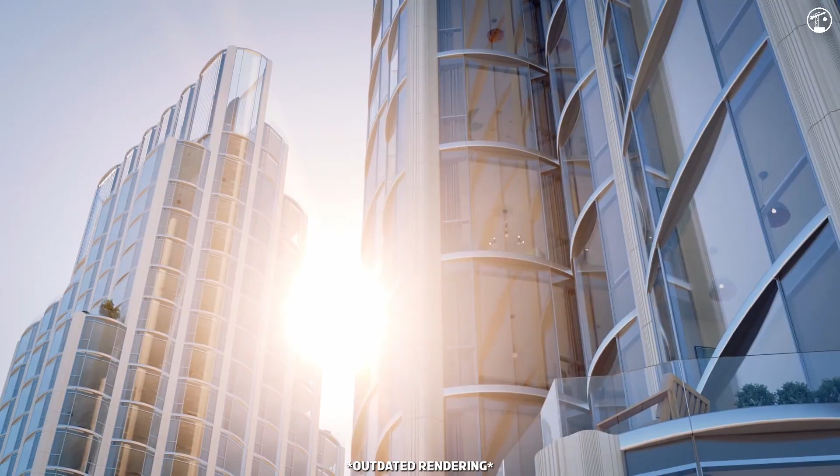This is 400 Lake Shore Drive. It's a site that's been waiting for its moment after one of the city's most ambitious skyscraper projects failed before it could rise. But today, this location is transforming, and the skyline of Chicago is about to change. From an unfortunate dream to a new vision, let's explore what's happening at this crucial spot in the heart of Chicago. To help me tell the story, I packed my bags, hopped on a plane, and traveled to the Windy City.

Chicago is an incredible city, and despite some of its well-known challenges, my limited experience in the area has been very pleasant. It boasts an impressive blend of architecture and history, making it one of the most iconic cities in America, all of which is nestled at the meeting point of Lake Michigan and the Chicago River. Today, we're zooming in on that very spot, at 400 Lake Shore Drive, a piece of land with a hopeful future that bridges these two waterways.

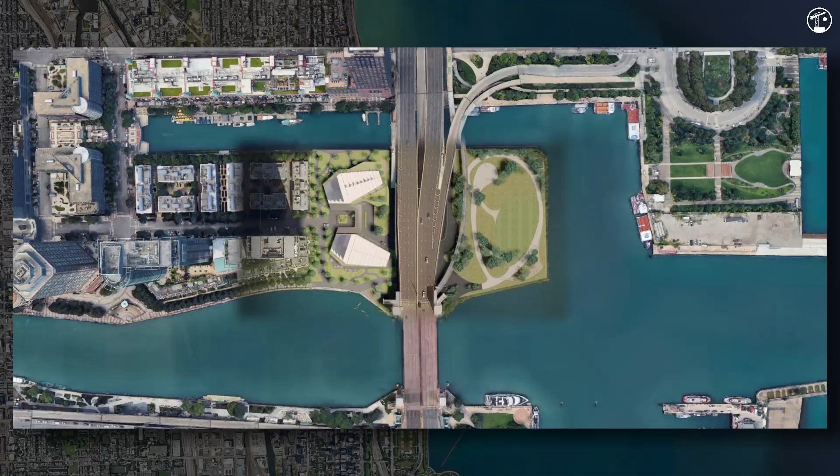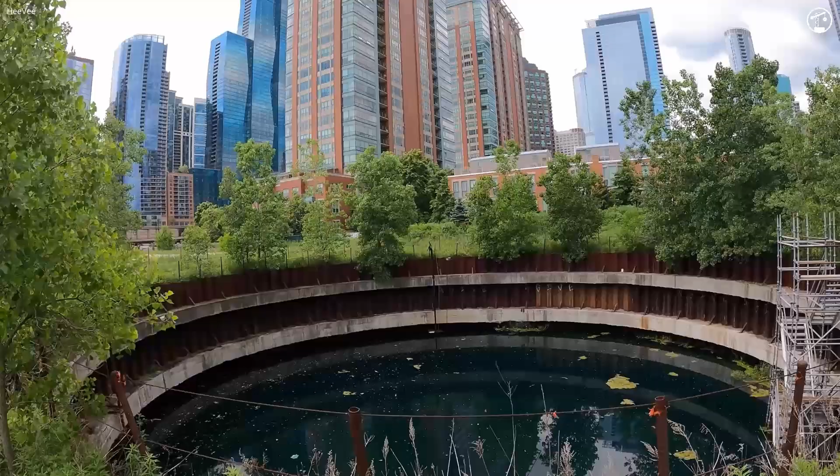The hole remained a relic as one of the most ambitious, yet ultimately failed skyscraper projects in recent history. Here's a quick 60-second summary of what happened with this project and why it was ultimately unsuccessful. In July of 2005, Christopher Carley of the Fordham Company proposed the Fordham Spire, a 116-story tower combining hotel and condominium spaces. Designed by renowned architect Santiago Calatrava, the tower was planned to reach 2,000 feet, making it one of the tallest buildings globally. Despite its striking design, it faced criticism, including from Donald Trump, who questioned its financial viability and security.

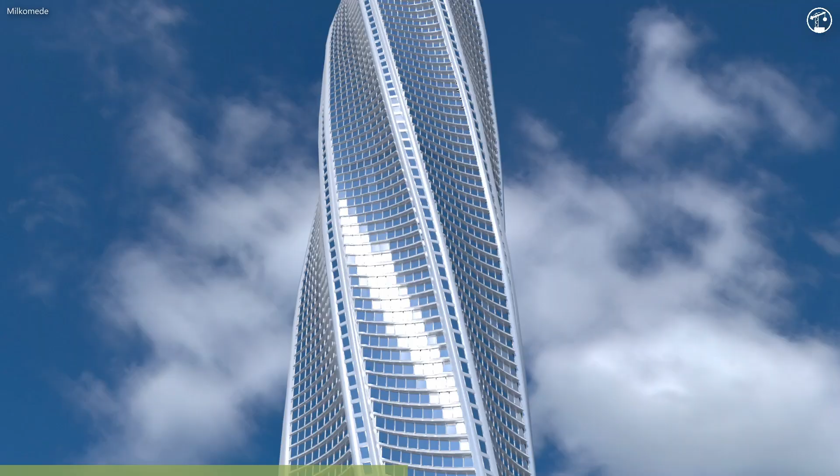Unable to secure sufficient funding, Carley passed the project to developer Garrett Kelleher in 2006, who renamed it the Chicago Spire. Kelleher revised the plans, removing the hotel and antenna, and focused on luxury condominiums. By 2007, the project was gaining momentum, with condo sales and city approvals. However, the 2008 global financial crisis led to a halt in construction, leaving only a massive excavation at the site. The project faced mounting legal challenges, and Shelbourne Development struggled to manage the loans and lawsuits. By 2009, the Chicago Spire was abandoned.

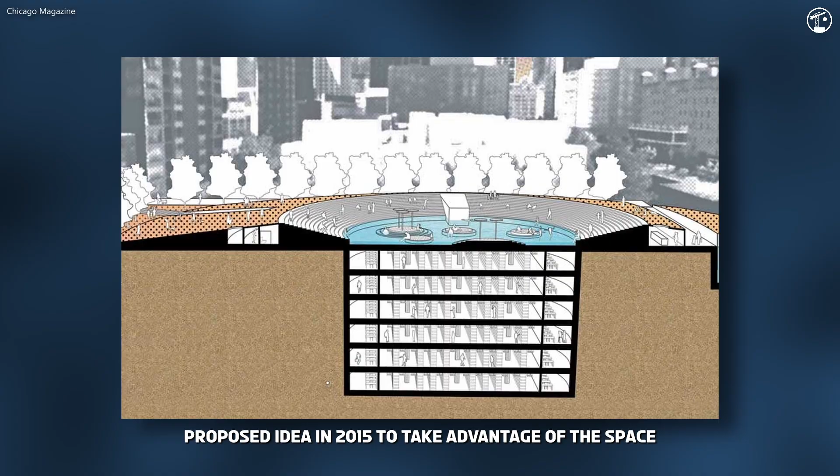Efforts to revive the project through union loans and additional financing proved unsuccessful. By 2010, the bank filed a foreclosure lawsuit. Kelleher's attempts to reorganize or regain control of the project were ultimately unsuccessful. In 2014, after years of litigation, the site was transferred to Related Midwest, marking the official end of the Chicago Spire project. But the 76-foot deep cofferdam remained, and because of its location, Chicago residents had a hard time not noticing it, and it quickly became an infamous eyesore. However, things were about to change.

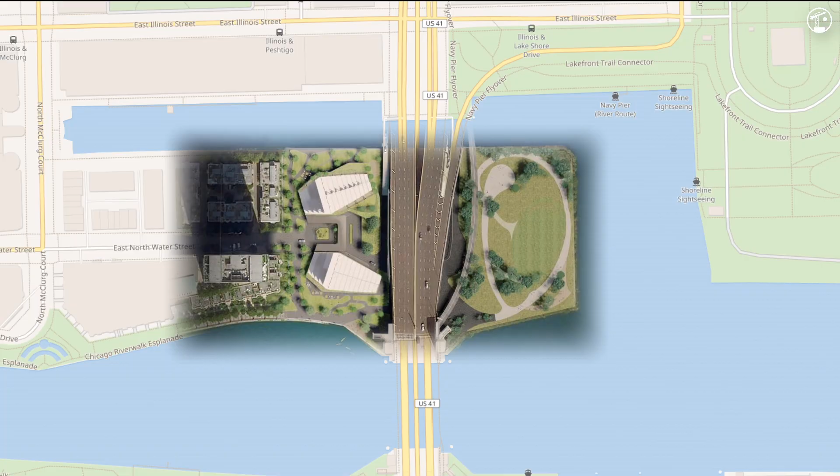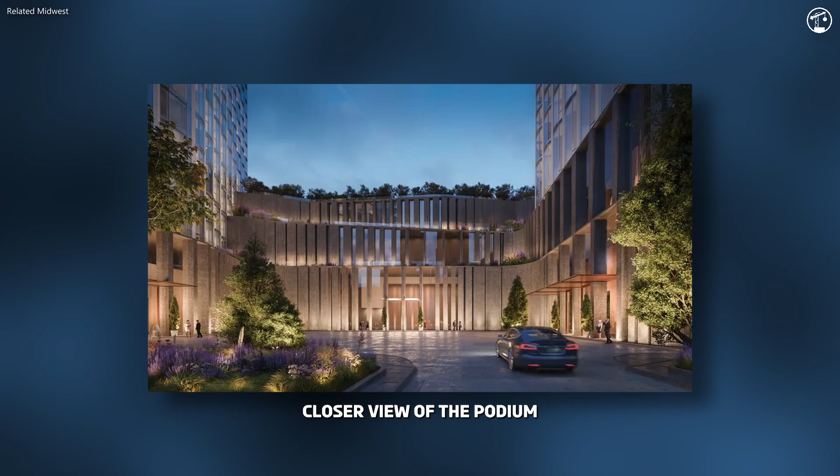The project encompasses two primary areas, the site where the north and south towers will sit and the fully redeveloped DuSable Park. In May of 2018, Related Midwest unveiled its initial plans for the site. The proposal featured towers reaching 1,100 feet and 850 feet. These would be connected at ground level by a podium that included 2 restaurants and a ballroom. The development was set to include 300 condominium units, 175 hotel rooms, and 500 rental apartments. However, in 2018, the proposal was rejected due to concerns about the development's impact on the surrounding neighborhood, specifically regarding the inclusion of hotel rooms and the size of the podium.

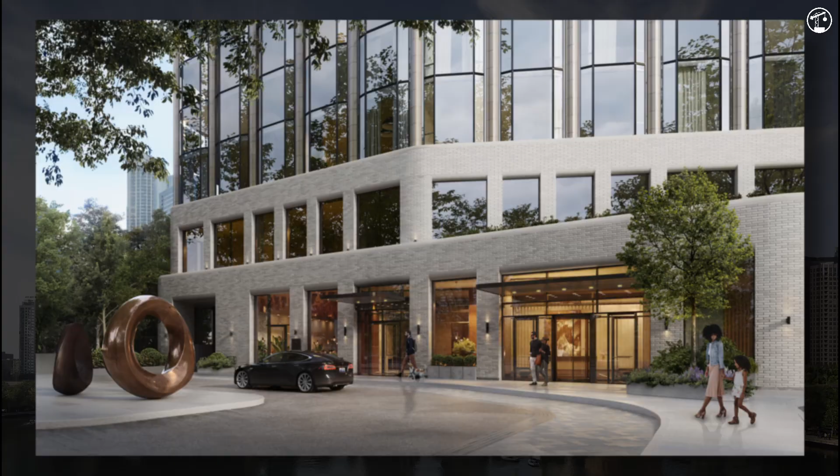In February 2019, the Chicago Plan Commission granted Related an extension of its zoning rights to allow for revisions to the design. By June 2020, the Chicago City Council approved an updated plan, which included significant changes. The towers were scaled down, with the north tower reduced to 875 feet and the south tower reduced to 765 feet. The hotel and condominium components were completely removed, and the podium size was scaled back. The architecture firm behind the design is Skidmore, Owings & Merrill. More commonly referred to as SOM, they have arguably the best portfolio of skyscraper design in the world. Within SOM, this effort was led by David Childs, who was also the primary architect for the One World Trade Center.

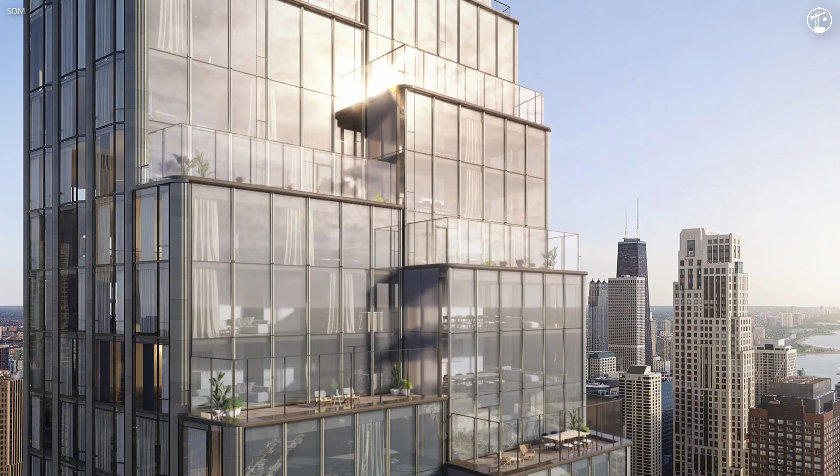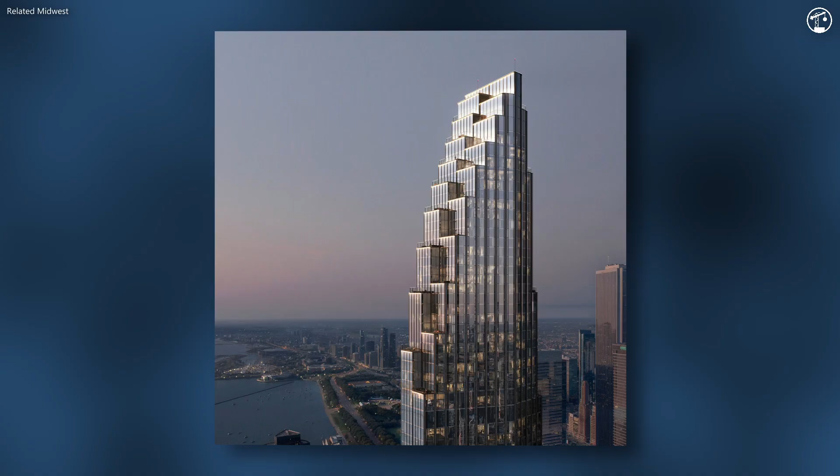The design will showcase bay windows in a champagne-colored panel system, moving away from the originally proposed terracotta exterior. The towers reimagine the Chicago window, a hallmark of the city's historic architecture, into a shallow bay of floor-to-ceiling glass that promises stunning views of the lake. The towers taper to frame the lake view while angling back toward the city. But the steps of the building are not symmetrical, they're staggered. This is because the winds blowing north off Lake Michigan would be less organized when trying to form a vortex, resulting in reduced sway for the building.

According to Related, the building's glass facade spans nearly 400,000 square feet and has been described as bird-friendly. The two buildings will provide a total of 635 new apartments, including 127 affordable units. Once completed, the North Tower will rank as the 13th tallest building in

Chicago. The development will encompass over 1 million square feet of floor space and feature 3 levels of underground parking. The first floor of the North Tower will include the lobby, a grab-and-go cafe, the underground parking entrance, and, of course, a much-needed dog spa.

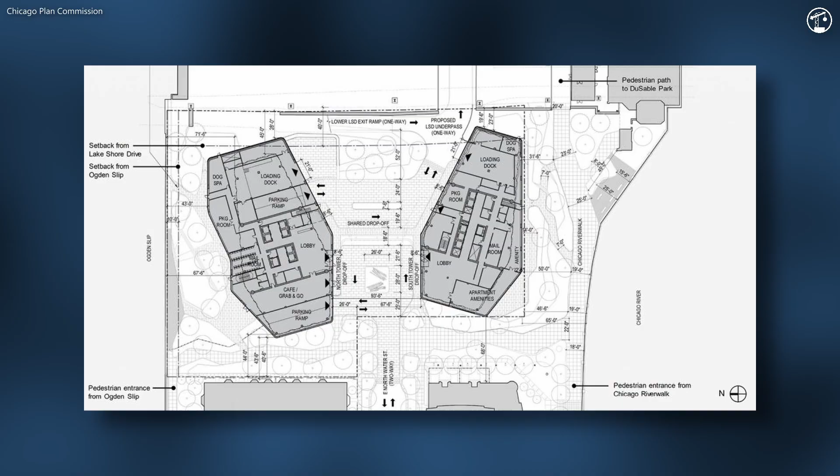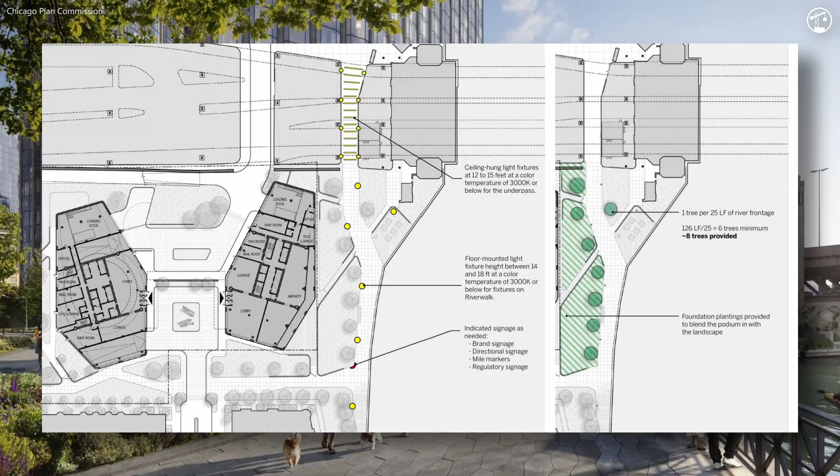Related Midwest will commit $10 million to the development of DuSable Park. They've also agreed to a list of infrastructure and design improvements at their cost. These include new security cameras, lights and landscaping along the Riverwalk, and improved pedestrian crossings. All of this work will finally extend the Chicago Riverwalk to the lake on the north side of the river, providing access through an underpass that crosses Lake Shore Drive.

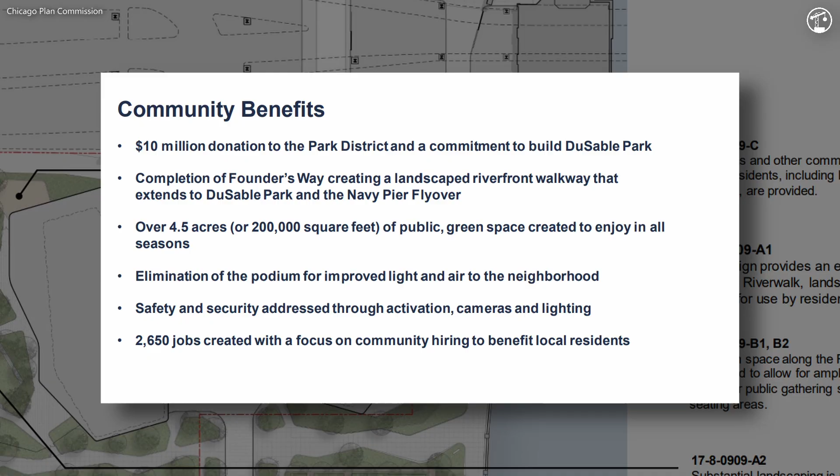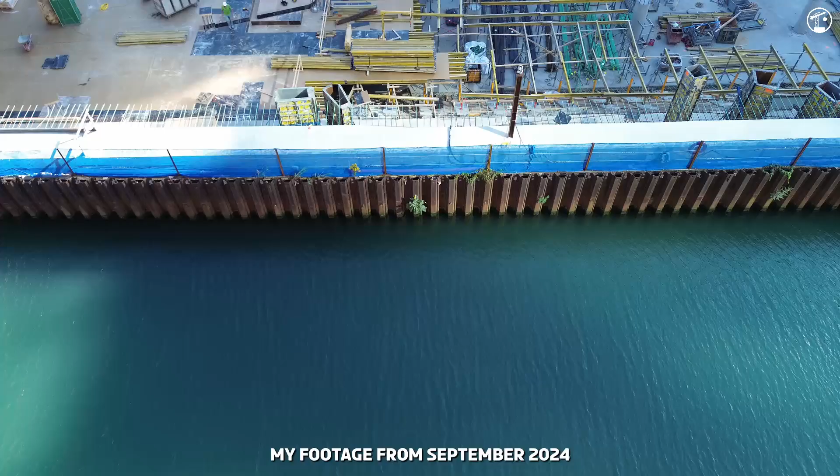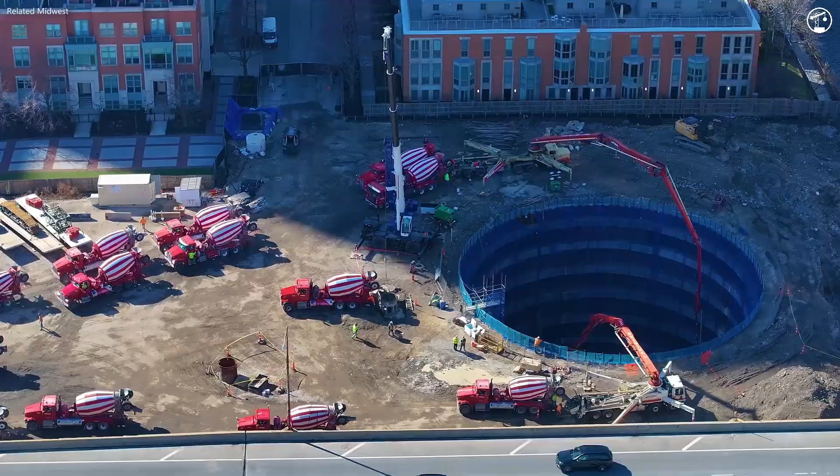You might think that having an existing hole for the foundation would be a benefit, due to the lack of excavation that would need to occur. But in reality, it's a major challenge. To start things off, the over 2,000 cubic yard concrete mat was placed in late February. According to Urbanize Chicago, over 250 concrete trucks arrived in steady succession every 2 minutes during a 12-hour window, delivering a staggering 9 million pounds of concrete.

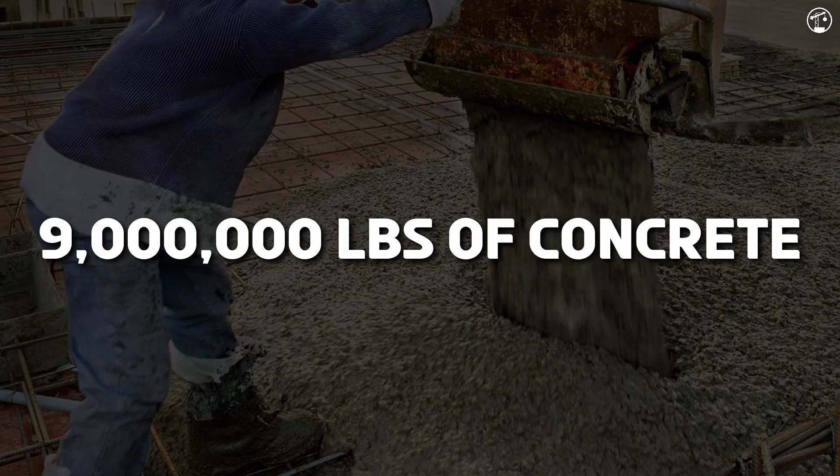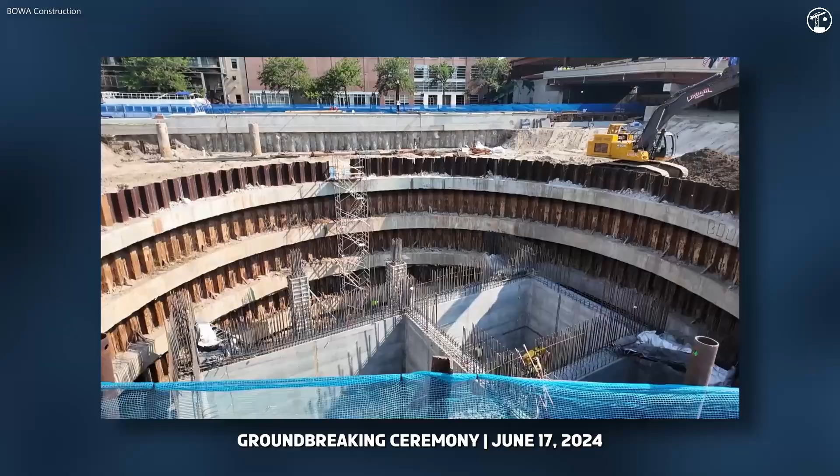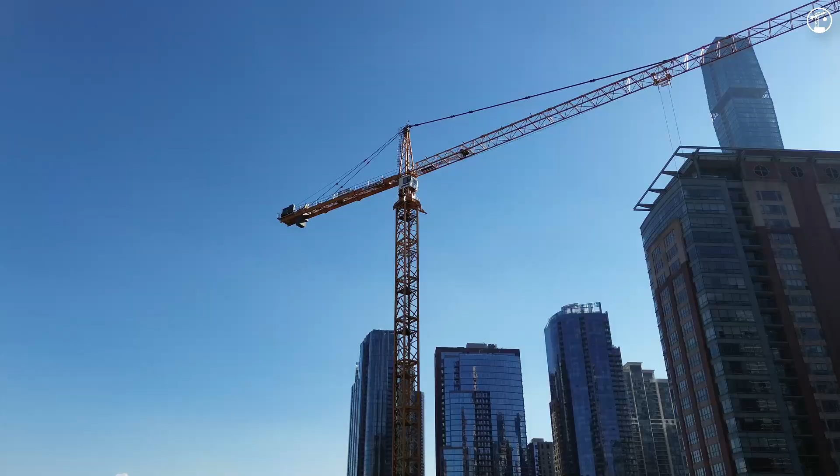As of the time of filming this, in late September, the foundation is rapidly being built up. There's a massive crane on site that was very active for the entire stretch that I was there. As you can see from this picture, the concrete and rebar have finally emerged above ground level, and there are several columns being built up across the site. It seems that all evidence of the cofferdam that sat here previously has been completely wiped out. It's always so interesting seeing projects like this in person, especially at such an early stage. According to sources, the North Tower is expected to be completed and move-in ready by 2027.

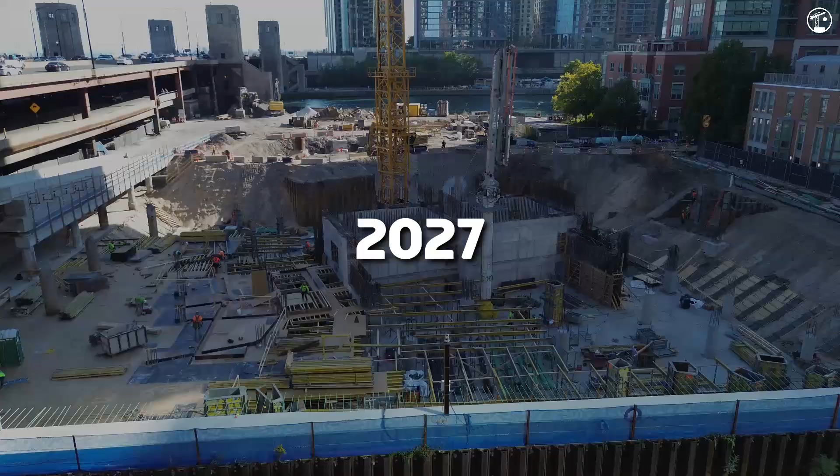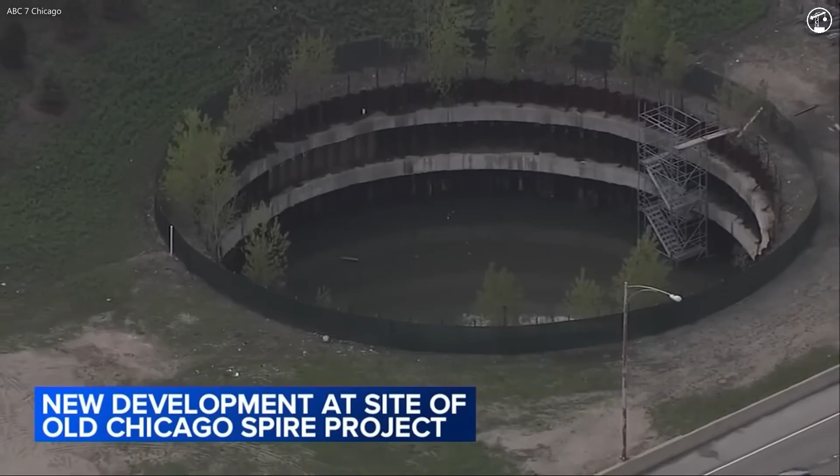Back in January of 2024, it was revealed that Related Midwest secured $500 million in construction financing for the 2-tower project. The financing was sourced from tax-exempt bonds issued by the IHDA with backing from Wells Fargo and other lenders. Additionally, Related Midwest and its partners are contributing equity, though the overall project cost remains undisclosed. The development marks a shift from the original $1 billion plan unveiled in 2018, which, as I mentioned earlier, included a hotel and condominiums. Instead, the developer revised its focus exclusively on residential units, looking to tap into Chicago's booming

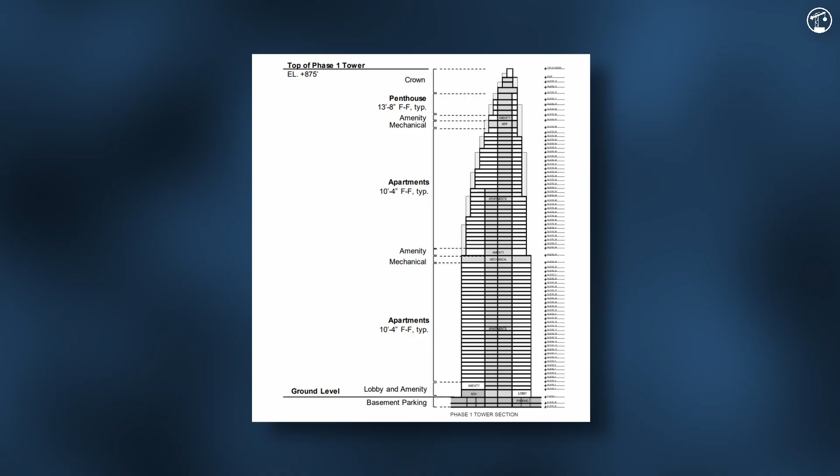multifamily housing market. The head of the Chicago office for Related Midwest noted that the growth in the sector can be partially attributed to the fact that more highly educated professionals are moving to downtown Chicago than to any other major city center in the US. But despite extensive research, I couldn't find any definitive evidence to support this claim. However, it is reasonable to assume that highly educated individuals are more likely to live in or near major cities, as these areas tend to offer greater professional and career opportunities.